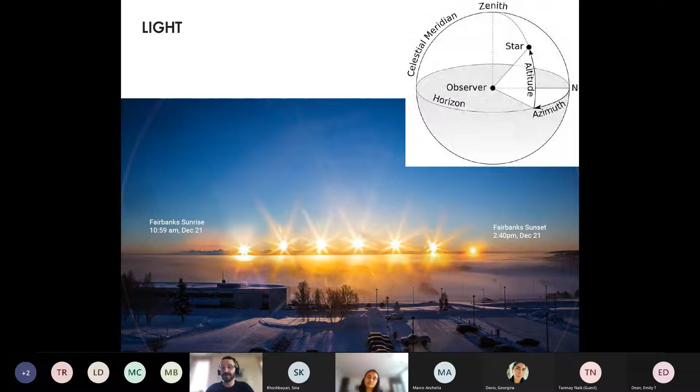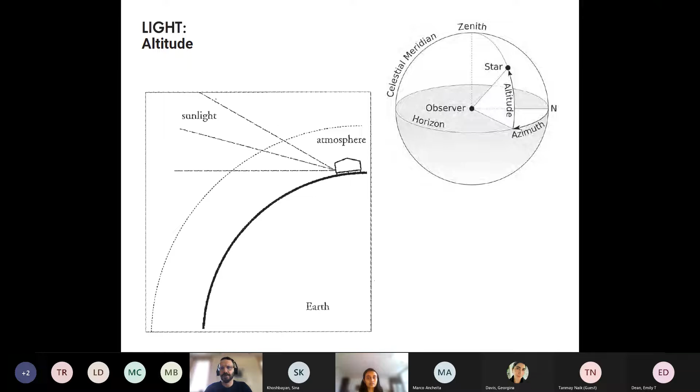However, it sets and rises in different places, and also because of our northern location, the sun never reaches the same altitude. If you're near the equator, then you know that at noon on June 21st, the sun is almost directly overhead. It's almost at a 90-degree angle in altitude. And in the north, it pretty much never gets that high. It is much lower in the sky, even on the longest day of the year.

Next slide, please. What does that mean? It means that our light is fundamentally more horizontal in nature than it is in most places in the world. The sun is not necessarily always overhead. It is out there somewhere in front of you in a horizontal relationship. Obviously, this is a small thing and it's a huge thing. It has an amazing effect on what we do with buildings.

If you live on the equator, then you block the sun because it's too hot, but you block it through your roof. If you're in the temperate regions, the mid-latitudes, then you filter the sun so that you get it when you need it in the winter, and you block it when you don't need it in the summer. But again, you're blocking it and filtering it through your roof, through a horizontal surface,

working against or with a vertical design input. In the north, we try and capture the light, but we do it through our walls. We don't do it through our roof. We do it through vertical pieces of architecture. And this has huge implications on very simple things about what a building should do, how it should behave, and what it should look like. Next slide, please.

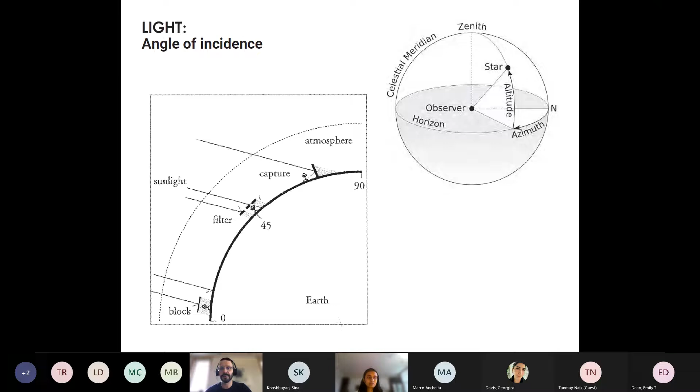It's a basic passive solar gain diagram. It's 101 level stuff for coursework in architecture and design. To calculate a proper overhang, you take the angle of the sun on the summer solstice, the one that you're trying to block. You take the angle of the sun at the winter solstice, the one that you're trying to capture and allow light to enter deeply into your room.

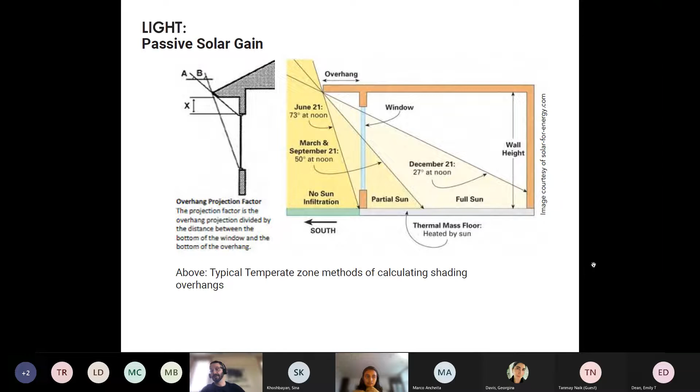And you calculate between those two an overhang in a horizontal dimension that'll allow you to capture the winter sunlight and block the overheating potential of summer sunlight. So this is something that we already all know how to do in architecture school. Let's bring that to a northern context with everything we've just learned about the quality of northern light. Next slide, please.

If we were to take the same process of creating an overhang based on blocking summer sun and allowing winter sun in, those overhangs would be incredibly unmanageable and structurally unbuildable. And that's even before we handle the snow load. So our best practices that we've already learned, they don't work in this new land. They don't work the farther north you go.

So we have to think differently about the way that our buildings are going to allow for daylighting and for blocking of sun. Because if in the winter the sun rises and sets in the south, then there is virtually no reason to have windows in the north side of your building. Northern light is much coveted in architectural circles, in warm places and in hot places. It's a nice base, cool light. It's always been the best light for artist studios, for architecture studios. You don't worry about overheating.

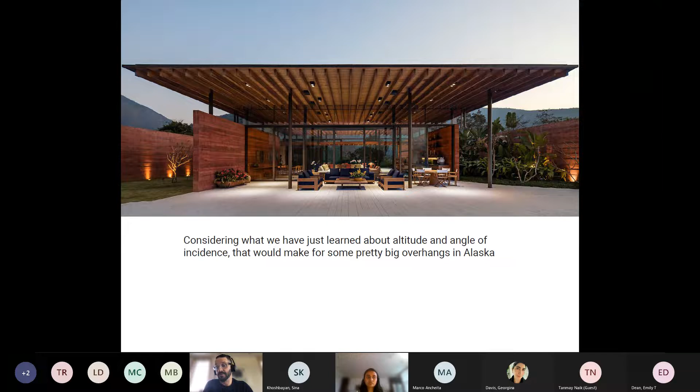In Alaska, in the winter, when you need the heating the most, you'll get no light from the north of any kind, unless it's refracted off the snow. Northern sides of buildings are just places where you leak heat. They're good places to put windowless areas, bathrooms, loading docks, server spaces. Next slide, please.

Additionally, if you're thinking about energy production, then we're thinking of new ways to treat this northern sunlight as well. If you want summer sun for solar PV, if the sun is hitting your wall more than your roof, then that's where your PV belongs. If your sun is never going to get to the angle that it does in the temperate region, then the more vertically angled your solar PV is, the better.

Additionally, if you're getting most of your light in the summertime, where we have a high azimuth for our light, then an eastern and western face of the building may be as worth the investment, not only the southern face of the building, because we're rising at 3 in the morning in the north by northeast, and we're setting at midnight in the north by northwest. That's plenty of time for the sun to hit the western and eastern faces of your building. There are other reasons that you see this. Next slide, please.

The conventional wisdom is that the best orientation for the most efficient solar production for electricity is the latitude plus a certain amount of degrees. But once you get above 60 degrees latitude, the difference in efficiency really is negated by simple things like snowfall. So here we have an arrangement of solar panels where 3 of the solar panels are put at what math would tell us is the optimal angle for getting the most electricity out of the sun.

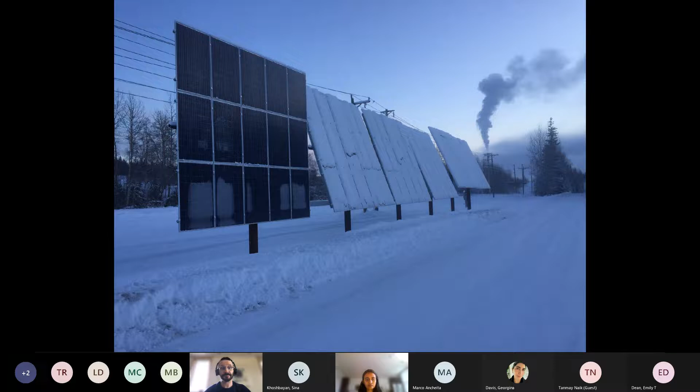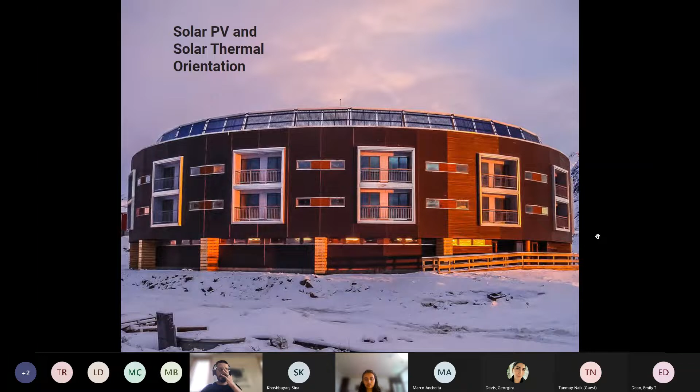Here's a building. It's a dormitory building. And when I look at a building like this, I think to myself, at least in terms of light, now we're thinking like northern people. This has solar thermal array on the building, but the solar thermal array tracks the natural azimuth of the sun in the summer. It goes all the way from the northeast to the northwest, so that it can be getting warmth and hot water for the full amount of the sun's horizontal traverse across the horizon. It is also on the roof, but it's in a near vertical position so that it's able to get that horizontality of light.

And the rest of the building looks warm. It looks fortressed against what is obviously a physically antagonistic environment. I think this looks like a building that belongs in the north. Next slide, please.

So now we just spent 5-7 minutes talking about how we have to relearn everything we thought we knew already about light. And we're going to have to go through this exercise in a primer lecture about northern design for land, for warmth, for any other of things that we already knew quite a bit about that we need to unlearn. So we're going to move on from light to land. We're going to talk about the way that the Arctic specifically has a relationship with land.

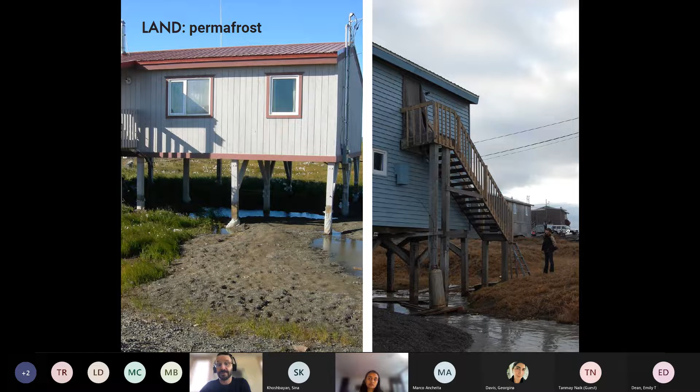But if your first question when you get a new commission is, is the ground frozen? Now you're thinking like a northern person. Now we're thinking like northern designers. It's an important part of how we approach a site. Next slide, please.

I'm going to show you a couple experimental foundations. These aren't things that I am going to present as best practice because I'm in research, and so we're supposed to be pushing new types of foundations. So the foundations I'm going to show you here are not necessarily typical, but they are things that we're working on to try and appeal to the level of change that we're undergoing right now.

This first foundation is in a village called Mertarvik, which is being moved. It's a village of 280 people that is being relocated as their village falls into the sea from coastal erosion based on climate changes. The problem with moving 280 people across a bay to a new location is that there's no time for platting and subdivision planning and surveying. And so the houses don't have a site. There's not enough time. So we had to create a foundation that was movable on skids.

We created a rigid foundation of a space frame that's on skids that could be built during the short summer seasons and not have to worry about being held back by administrative issues. Once the new town is platted, this house can be towed, or was towed, to its plot. You know, with as many difficult issues as we have with our physical environment, worrying over the permitting and legislative environment is not a luxury that we have. And so there's kind of an urgency to the way we design foundations. Next slide, please.

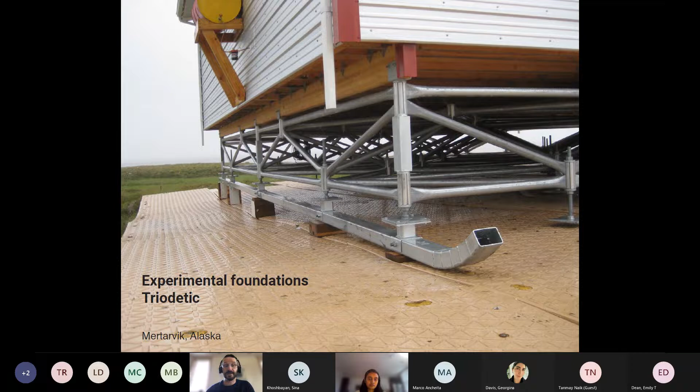And the people we like to test the more risky foundations on are ourselves. This is where I live. I live in a little group of 4 buildings called the Sustainable Village at the University of Alaska Fairbanks. We designed them specifically because the land is 31.5 degrees and ready to thaw. When that happens, no insurer, no bank, no developer is going to touch this land, and it's in the middle of town. And so how do we deal with the changes that we're seeing in our landscape?

So what we did was we built these 4 houses. I live in the one in the top left, the yellow one. You can see University of Alaska in the background. We tested these houses with various different foundations, some of them more conventional, some of them a little braver, to try and see what will happen when that land inevitably thaws. And then we put thermistors down in the land 30 feet so that we're ready when that happens. Next slide, please.

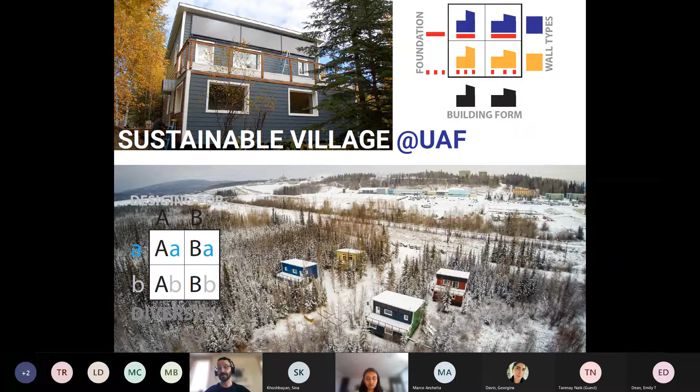So in the house I live in, we basically built a foam raft foundation that we're hoping can span the land when it finally melts, while simultaneously buying us some time to keep the melt from happening. So we've got over a foot of foam insulation married into the network of lattices. You can see that that's steel framework. Now, if you've taken your thermodynamics course, you're thinking, why the hell are they using steel? That's a great conductor of heat. And we're going to talk about that a little bit later. Next slide, please.

This is the research center itself. It's the northernmost campus of the National Renewable Energy Lab. They have a couple campuses in Colorado, one in DC, one in California, but this is the Arctic one. It's on terrible land. It's on land that is fractured schist and more silt than anything else. And it was cleared at one point, and then began to thaw. When land thaws, it does unpredictable things, we have found.

What we did was, because it's a large building, it's 20,000 square foot, you can see in the bottom portion, we excavated what looks like a pond, but really we excavated the mass of the building and we put it on the site for 2 years to overwinter to see how the land, as it changed its thermal regime, would handle the load of the building. We were able to make some assumptions based on that data. Next slide, please.

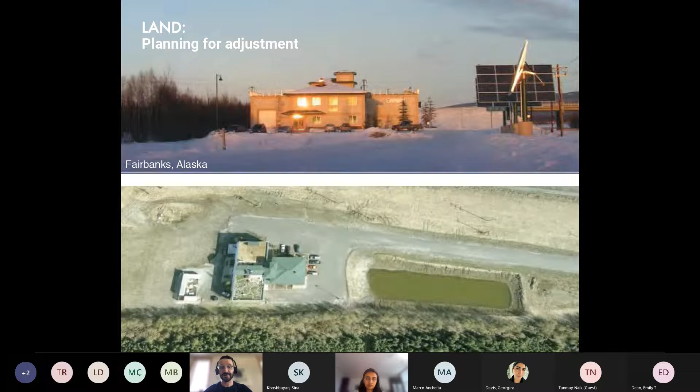That's not really enough, because a couple tons of dirt on your site before you build the building isn't really going to tell you exactly what the building is going to do. And so after that, we super insulated the foundation, but we also mechanically separated the spread footing from the grade beam of the foundation. And what does that look like? Next slide, please.

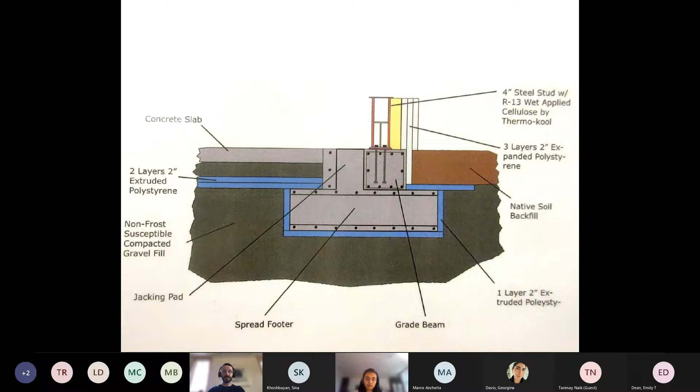It means that in each pilaster, we have a plenum where, if need be, and the ground starts to really change and melt, we're able to jack the foundation and move the building. At 20,000 square foot, I believe this is the largest adjustable foundation in the Arctic, in the north. And for better or worse, we haven't gotten to test it yet.

You know, half the crew here is pretty proud that we insulated it enough that we're still on stable soil, and the other half is getting pretty impatient that we haven't had a chance to test this new toy and see if we can adjust a building this size. And that's what research looks like, waiting for disaster and then getting impatient if it hasn't come yet. Next slide, please.

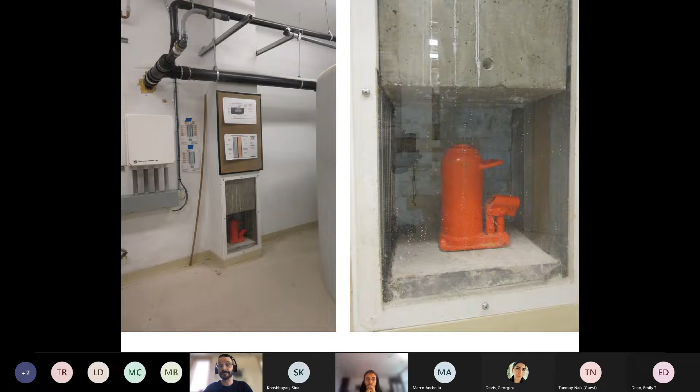So we've talked about light, we've talked about land. This is probably the least surprising one. In the north, we always talk about heat. Heat is king. 80% of our energy load is heat instead of electricity. When you live in a place that is cold enough to kill you, you care about your heat more than you care about your light from an electricity and power standpoint.

The interesting thing is, all the animals that thrive in the north, they don't eat more food in the winter in order to stay warm. Northern animals grow thicker skin. They grow blubber, they grow fat reserves, they have thick coats. They don't just eat more. And yet, for most of my lifetime, the way that the design industry has treated northern buildings is to have thin walls and just feed them more fuel. It took an embarrassingly long time to rethink that. And it is being rethought now, but it's late to the game.

Generally, a northern wall or a northern approach to heat, a northern building should have thicker skin, unless you're using something like vacuum insulated panels or aerogel or some of these magic materials that we rely on or hope will come into the industry for us. Until those times, a northern wall is a thicker wall, and it's a wall with a thermal break. It's a wall where nothing that's touching the inside of the building is also touching the outside of the building and forming a bridge between the cold of the outside and the warm of the inside.

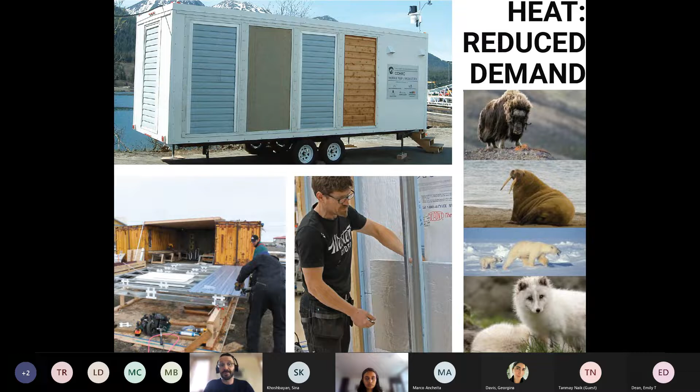And this is what that looks like on a construction site. We're looking at a lot of petroleum-based polyurethane, bad for the environment materials that we're used to using to get our thick coat on our walls. And that's really where the next jump needs to be made: if we need a thick wall, what are we going to make it out of that has some presence in the circular economy, has some ability to go back to the earth? Because right now, out of desperation, we use a lot of pretty bad stuff to keep ourselves warm. And I think that's where we need to go next.

If half the R&D went into the demand side that it does on the supply side, we'd be doing all right. And as young designers, as people getting ready to start your careers, if you're interested in being someplace exciting, then the demand side of envelope and the way we do envelopes in buildings, that's an exciting place to be positioned.

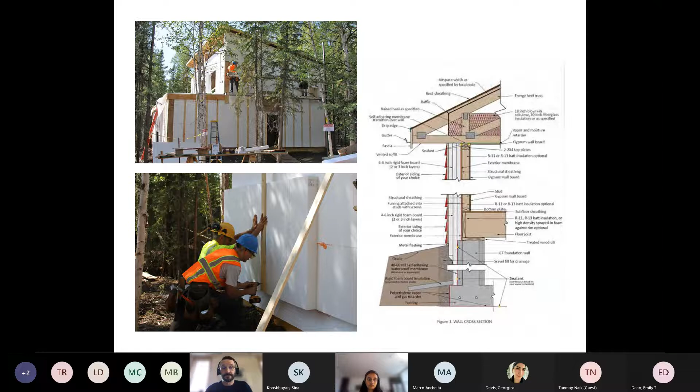And it's not all chemistry and rocket science. Some of it is really simple stuff. A northern building will leak less heat if it has more volume as a relationship to its surface area. This is simple geometry. It's something that we need to think about as the first principle. If we're a northern designer, or even if we're a southern designer designing a building for a cold climate, half our job could be done with geometry, thinking about what is the surface area to volume ratio of our building.

That is the easiest. We don't say low-hanging fruit in Alaska because it's too cold to grow fruit here, but that's the easiest, simplest thing to get at first: what is the shape of my building?

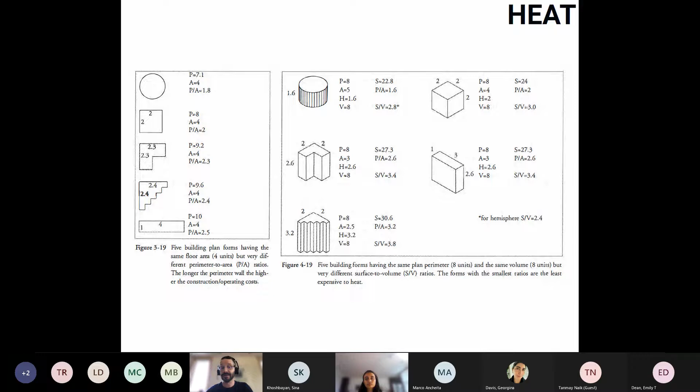These types of things do not take fancy wall sections. These are simple ways of looking at space, looking at warmth, and looking at a building not just as a place that you occupy, but the thing that keeps you warm and keeps the outside out and the inside in.

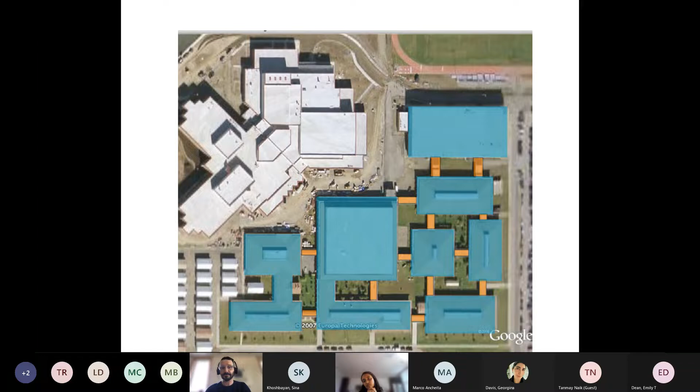So thermal bridging and detailing is something that comes into play here because not only do we want to limit our surface area to volume ratio, we want to make sure that in key places like inside corners, in our stair platforms, in our building plates, our floor plates, how are we going to insulate those? How do we wrap a coat around the parts of the building that are supposed to tie our structure together?

It creates a new way of thinking about structure. A northern way of thinking about structure is that all of it happens inside the coat. If you've ever designed a curtain wall, that is the opposite of the way that you're used to thinking about buildings. Generally, the structure happens on the outside of the thermal layer.

So again, and if you're sensing a theme here, I think it's something that is meant to be obvious. Fundamental things that we know to be true are opposite when we get to a place that gets to 60 degrees below zero in the wintertime. And those fundamental things that we think we know are probably the most dangerous things as we move and practice in a new place.

If I were practicing in the desert, I've never spent much time in the desert. Chances are I'd make some pretty elementary mistakes from the point of view of a desert person, because all of my thoughts of what a building's supposed to do are based in someplace far, far away.

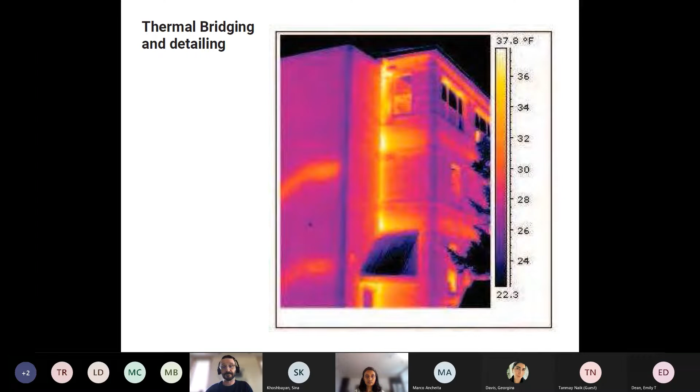So we can do more intelligent supply. I know that some of the people on this primer lecture are hoping to design a building in Cook Inlet in Alaska. Cook Inlet is a great place for all types of supply. It's probably one of the most energy-rich basins in the world. It's got some of the biggest tides in the world. It's got big winds. It's got interesting solar. It's got geothermal volcanoes. It's even got oil platforms. If you can run a motor off it, it exists in Cook Inlet.

If you live in Arizona and it gets very hot during the day and very cold at night, it's pretty easy to use the heat of noon at midnight. You just need to somehow store it for 12 hours. It's a lot easier to use the heat of noon at midnight than it is to use the heat of June in January. And that's really the problem that we have in the north, is how do we store heat from the summer when we don't have much need for it, but where the sun is up all the time? And how can we store it for 4, 5, 6 months? This is an interesting thing to work on from a thermal battery standpoint.

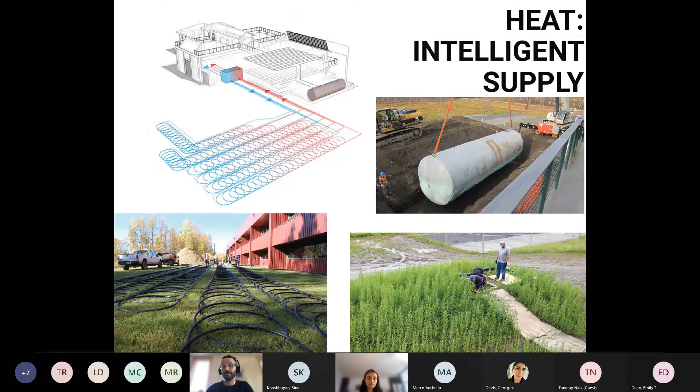So going through this pattern, we've been talking about light, we've been talking about the land, we can talk about air. Arctic peoples have the highest rate of respiratory infection in children and elders in the world. And it's not because this is a traditionally humid place. It's because we spend quite a bit of time indoors, and because the building physics of moving air and moving fresh air in a cold place are extremely complicated. And if not complicated, at least daunting.

We have a pretty terrible amount of mold in our buildings in the Arctic, and that's not just Alaska, that's everywhere in the Arctic. And there's a specific set of reasons why that happens.

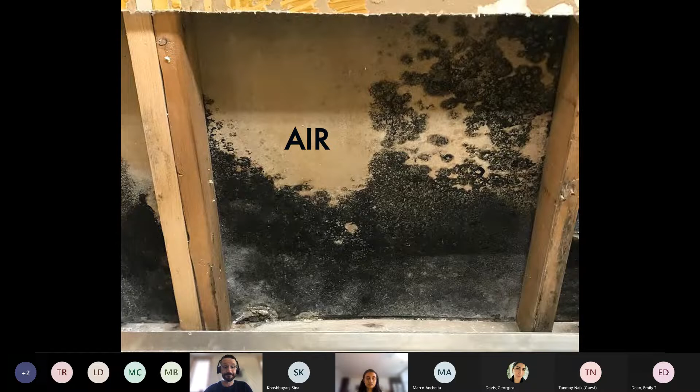One of the reasons is that if you're in an economically depressed community, you're more willing to pay for heat than you are for fresh air. If you don't have good heat, you can feel it. If you don't have fresh air, maybe you can smell it, but you can't see the things off-gassing from your furniture. You can't automatically feel the problems with health that come from breathing bad air.

So in economically depressed communities, it's very common for people to sabotage their own indoor air quality to save on their heating bill. And getting around that can be very difficult. It leads to mold, it leads to a lot of pretty terrible things.

So we're always trying to recover heat through our mechanical systems, heat recovery ventilators and energy recovery ventilators, things that allow the outgoing, all that wonderfully warm, terribly dirty outgoing air. We want to steal that energy and give it to our wonderfully clean and terribly cold incoming air. And from an engineering standpoint, that's no small trick. That takes some doing. Next slide, please.

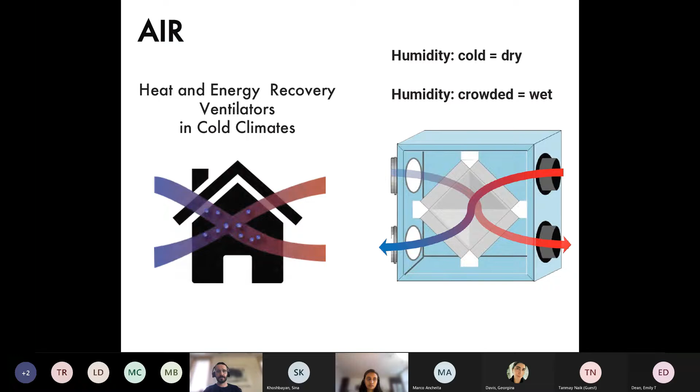So if you see things like mold in a northern house, if you see things like weeping windows, it's generally not a problem with the wall or the window. It's more often that we're underventilating, and underventilating is something that's very common here. Next slide.

The key then is to marry our fresh air to our warm air. If the air that you need that's warm is also the air that you need that's clean, then you're never going to turn it off. And so we spend a lot of time thinking about how to marry fresh air and warm air with our mechanical systems. And if you're an engineer, if you're an architect, this is an interesting idea. If you're an engineer, this is an exciting problem to work on.

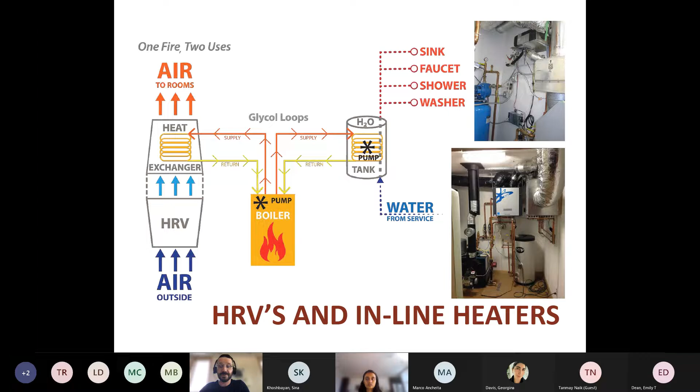Because we don't want the problems someone's already solved. What fun are those? We want new problems to solve, and here's one. If you can figure out how to make your warm air your clean air in a very cold place, then you're going to be doing important work. You're probably going to make a fair bit of money. It's a field that is still in its infancy, and I think it's something that's worthy of inquiry. Next slide, please.

The fundamental thing that I think causes the most mold in northern structures is a misunderstanding of dew point. Dew point occurs everywhere in the world. It's that temperature at a certain humidity when the gaseous moisture in the air turns to liquid.

If you're in Georgia or Indiana on a hot day in the summer and you have a cold beer or a cold can of Coke on your table, it immediately starts to gather water because it's cold enough that all the moisture in the air, the humidity in the air, condenses on the surface of the can and makes it wet. Wonderfully refreshing if it's a beer, terrible and catastrophic if it's a wall. If we don't understand how dew point works in northern context, we run a risk of rotting out our walls.

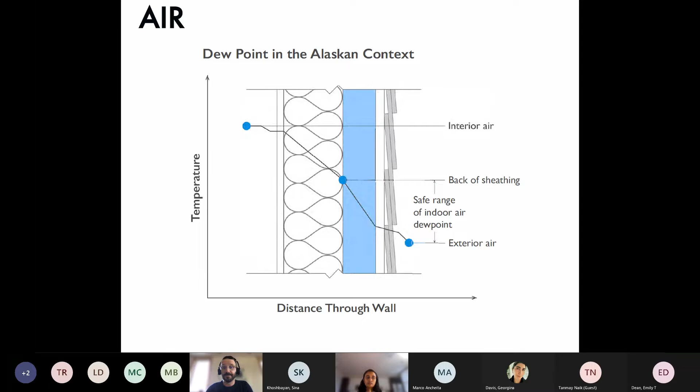And that's easier said than done. And Alaska is a big state. The Arctic is a large region. So dew point calculations are down to the city. They're down to the latitude. They're down to coastal versus interior.

If you're designing a building in Alaska, there are a series of dew point calculators that are down to the town, where you can decide how much impermeable insulation needs to be on the outside of the wall versus how much on the inside. And I'd encourage you, if you're actively involved in the design of a building, to get to know these dew point calculators and use them as much as you would any other tool in your software. Next slide, please.

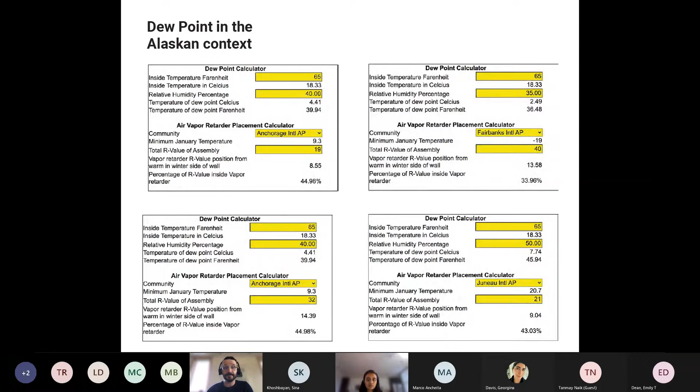One of the things that dew point is also important is because we have significant amounts of air leakage in cold climates. Stack effect is the idea that cold air will sink and warm air will be more buoyant and rise in any building. This isn't unique to the north, but the bigger the difference between your exterior temperature and your interior temperature, the more forceful stack effect is.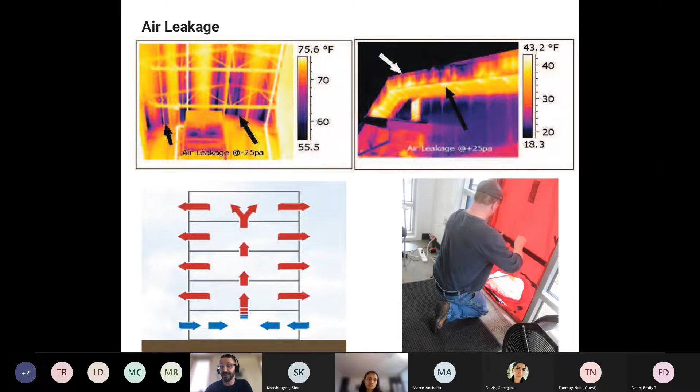So a 4-story building in a place like Washington, D.C., and a 4-story building in a place like Fairbanks on a day when it's 40 below is vastly different. So you have incredible pressures, positive pressures on the inside of our ceilings, and you have incredible negative pressures at the base of our buildings. Next slide, please. How do we handle this?

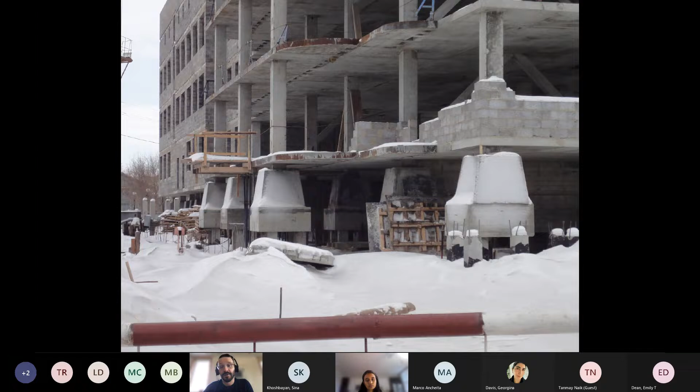This is the Russian approach. This is a building in Arctic Russia. You can see that it looks like it's built on the ground and that it's not particularly worried about stack effect. But if we tear the skin off, next slide, please, we can see that the entire base of this building is false, that it's not actually the base of the building. These giant, very expensive concrete members are lifting the building up above the permafrost so that the finished floor is over 2 meters off the ground.

And it's doing that for two reasons. It's understanding that stack effect is going to be intense in this incredibly cold environment. It's allowing that negative pressure to come into the building, all that cold air, and then putting your insulation above it so that the stack effect is not as damaging from a standpoint of heating. It also has an added benefit of keeping the ground frozen, because as we remember, the default status of the Earth is supposed to be frozen in this community. And so they're trying very hard to keep it that way. Next slide, please.

When we fail, you can see it. If you design a building that hasn't taken stack effect or pressurization or dew point into effect, you can see it in the roof, you can see it in your structural members, you can see it in your walls. It rots quickly. It is very unforgiving. Nothing fails small in the Arctic. Things only fail big. And so when you have an oversight for a detailing, it's not going to be a small problem of detailing. It's likely going to be a fairly significant one that you'll be able to visually see rather quickly. This is good from a repairs and modification standpoint. It's bad from a cost and liability standpoint. Next slide, please.

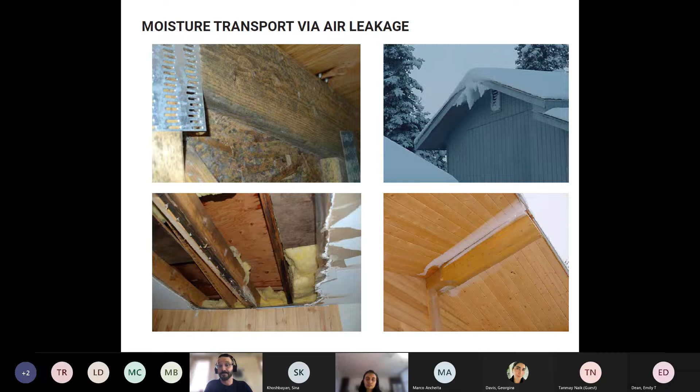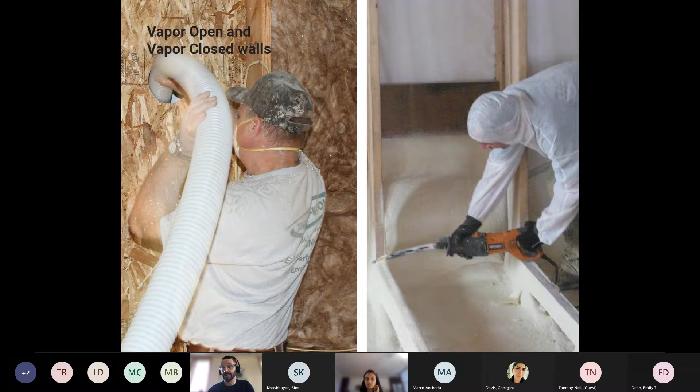So we anguish over vapor open and vapor closed walls. We anguish over whether or not we should be allowing diffusion through our walls. It's not really correct to say a house breathes, but, for lack of a better word, is the house supposed to breathe? Is it not supposed to breathe? That's not an easy answer in a cold climate. Depends a lot on humidity. It's a level of expertise that takes a long time to ascertain. If you're designing buildings for a cold climate, it's a good idea to have a consultant that this is all they do. This is all they think about, diffusion and air leakage in cold climates. Next slide, please.

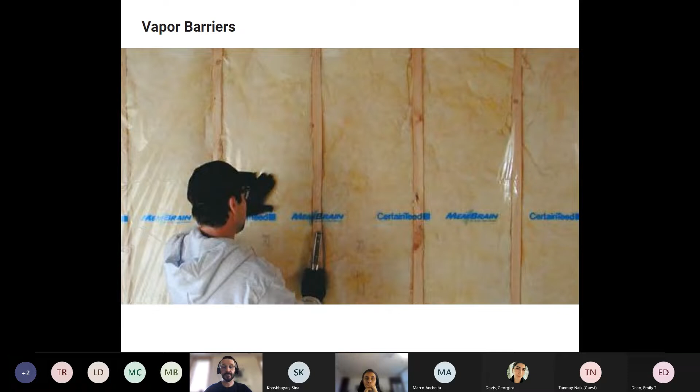And our vapor barriers have been our traditional way of handling that. Wrapping the entire inside of the building in plastic on the warm side of the wall. That's been the best practice for most of my lifetime. There are probably better ways to skin that cat, but so far that's still what is most common. It's skilled labor. It's not something that can be done by just anybody. It's something that you should definitely schedule into your inspection regimen. A contractor should always know that you want to inspect the vapor barrier once it's finished and installed, but before the interior sheathing goes on, and then the proper attention goes into it. Next slide.

If you're in a village with permafrost and no water and sewer, then someone in the family's job is to take a bucket full of your human waste and walk with that bucket in hand to this receptacle, and pour it in by hand. Usually it's a kid, and then someone comes and picks it up and brings it to a lagoon. And that is another pretty big problem in Arctic regions.

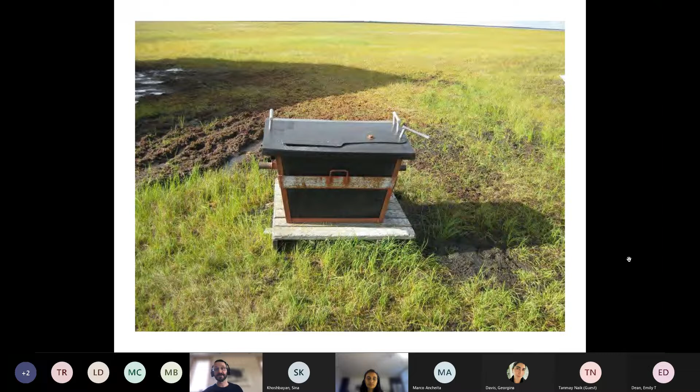The alternative for most of my lifetime to that bucket, we call it the honey bucket, is this: a water system, a sewer system that is above grade, because remember, the ground's frozen. We can't put it below grade. It's above grade. You've got to drive over it. You've got to put bridges over it. It's a line that everyone can see. It's a line that's out in the elements and has to be mechanically heated so that it doesn't freeze, and it goes to the treatment plant at the edge of town on top of the tundra.

The idea, well, there are many places in the Arctic that still don't have running water and sewer. We're still using buckets and we're still hauling water from the river, which is crazy because the Romans and the Chinese had running water thousands of years ago. But those are southern aqueducts.

I think it's no mistake that the idea that you should defecate in the same place that you sleep was invented in the South, because no northern person would have ever invented that. I think that it's an assumption that we make about the way that houses work and the way buildings operate. If our primary concern was keeping that thawed enough to get it someplace safe, then we wouldn't set up our infrastructure in a linear fashion. We'd be doing something different.

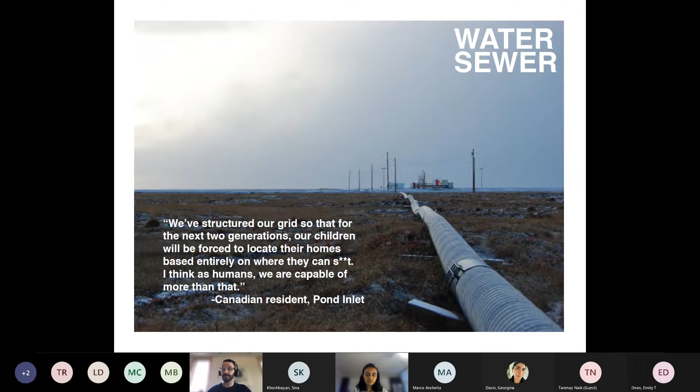Next slide, please. So these are systems that think more like the northern context. We have site-based single-family sewage treatment plants, as opposed to trying to run pipes all over the tundra in the cold to get to a centralized sewage treatment plant. Now, if we come from an urban area or a southern latitude, we've been taught that centralization increases efficiency, but only above zero. Centralization does not increase efficiency below zero, or not necessarily anyway.

And so many of our approaches to infrastructure need to be point source if we're able to build buildings that will work in our physical environment. So this is a house-based sewage treatment plant. Next slide, please.

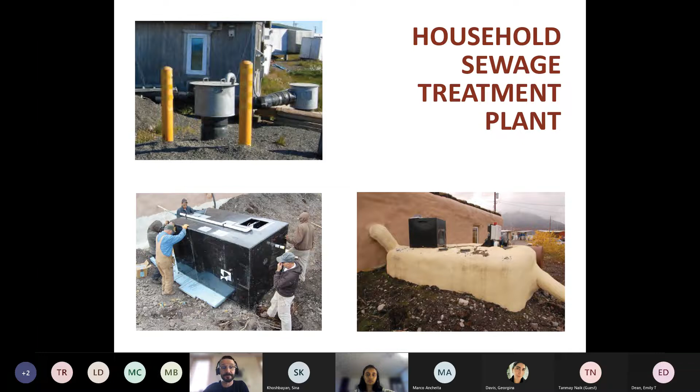And this is a water purification plant tied into a sewage treatment system for a northern context. And basically what we're doing is we're imagining delivered water, and we're imagining treatment of wastes on site in a way that it can be at the scale of the home, the scale of the building, instead of the scale of the village or the community. And this is a very different way of looking at infrastructure. Next slide.

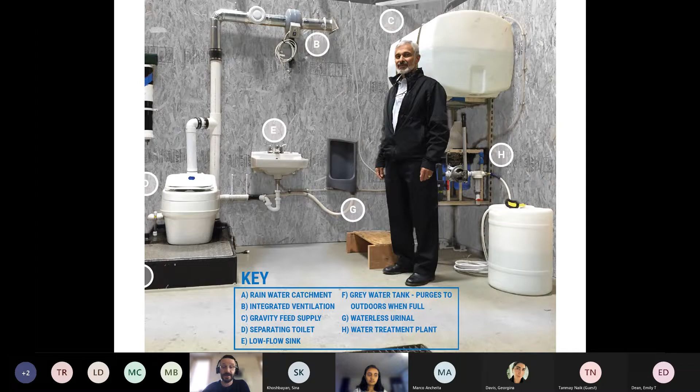Snow is vector transport of particles. So when you think of snowdrift, think of it like sand dunes. It doesn't matter how much sand there is. It matters what the wind does with it. So when we think of snowdrift, we don't think, oh, it snows a lot in this area, I bet there's worse drifts. What we should be thinking is, this is a windy area. The amount of snow from a calculation standpoint is considered to be infinite. So the wind is really what we want to track: how much snow is moved around.

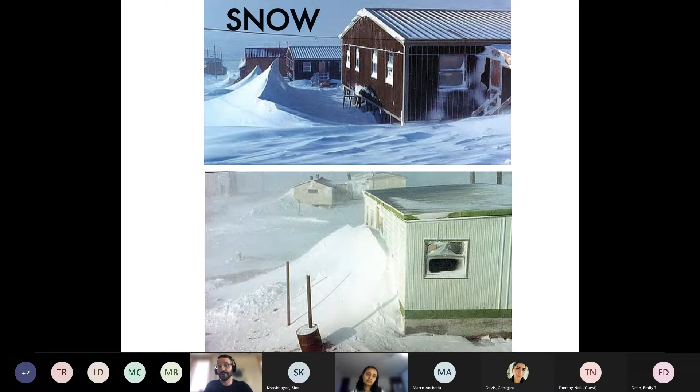Next slide, please. And that is more or less predictable. In an area prone to snowdrift, there will be a scour zone roughly equal to the height of the building in front of the building on the windward side. On the leeward side, the far side of the building, the part sheltered from the wind, the snowdrift can creep to 10 times the height of the building, and it can bury the entire building on the leeward side.

If there's any rafters or river hounds here, it's a lot like eddies in a river. When you're in the fastest channel, it's clear because there's not as much in suspension. It's moving fast. When you go out to an eddy, that's when the sand and the silt and everything gets deposited. Snow is no different. As soon as we find shelter from the wind, the snow finds a shelter as well.

And so an incredible amount of unnecessary diesel fuel is used to dig buildings out. It's a place where we could do better as designers. Next slide.

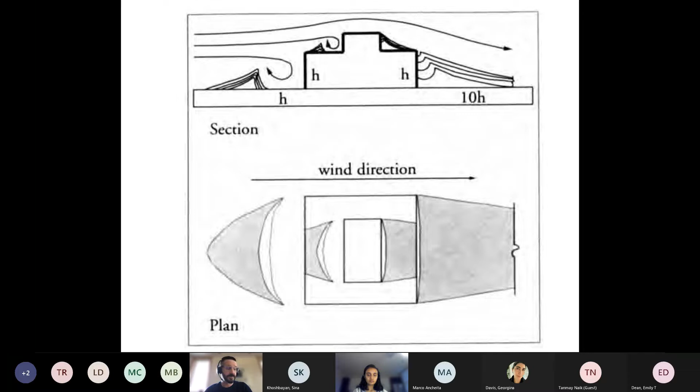So this is not an asterisk, this is a prime determinant in many regions of the state. Not every region, so just like when we talk about permanently frozen soils, one of the first things we should ask is: is snowdrift a design input for this region? Next slide, please.

So thinking about accessibility, thinking about universal access to our buildings is different in a cold climate. Our buildings are up off the ground. We're dealing with snowdrift. We're dealing with different things. And so it's something that we need to consider in our design. Next slide, please.

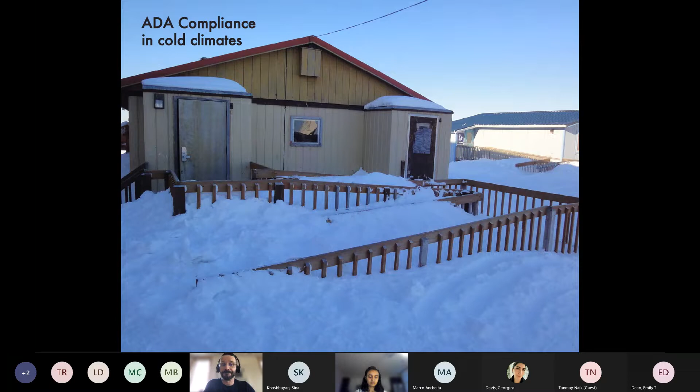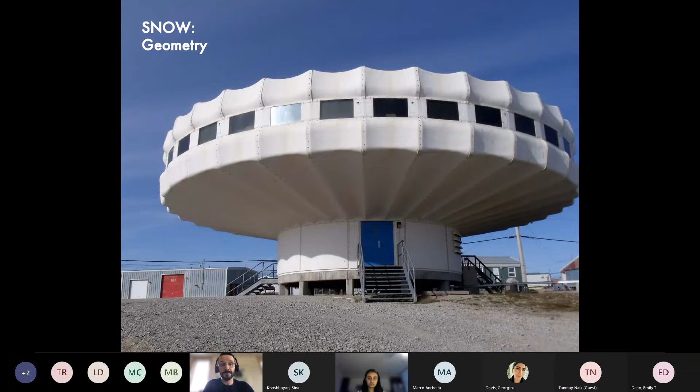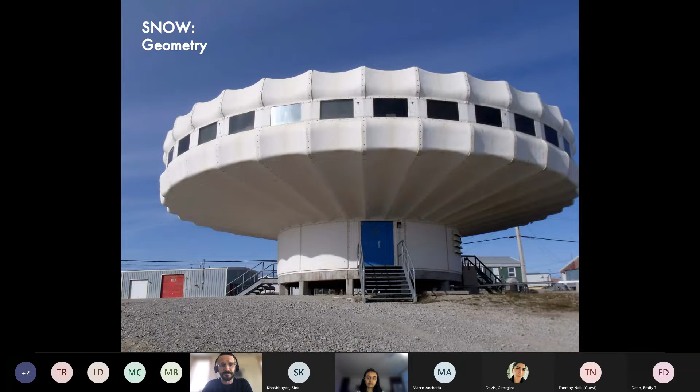Now you could handle snowdrift completely just through geometry. This is a research station in Cambridge Bay, I believe, that basically is optimized for snowdrift. Go ahead and next slide, please. So it was created specifically because it was going to be deployed in a place where buildings were routinely buried by snow. Not that there was that much snowfall, just that it was a very windy place.

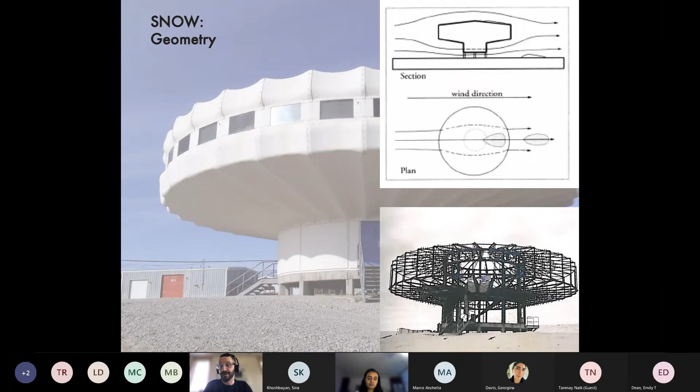It's one thing to handle the physical environment, but there's also the cultural and the way that we use space. Sometimes those don't line up nicely. And so it's important to think not only in terms of the physical parameters that we're trying to design for, but ultimately buildings are for people. At the end, you want a building that people are going to want to occupy. It's not merely enough to be able to respond to the physical parameters of the environment. Next slide.

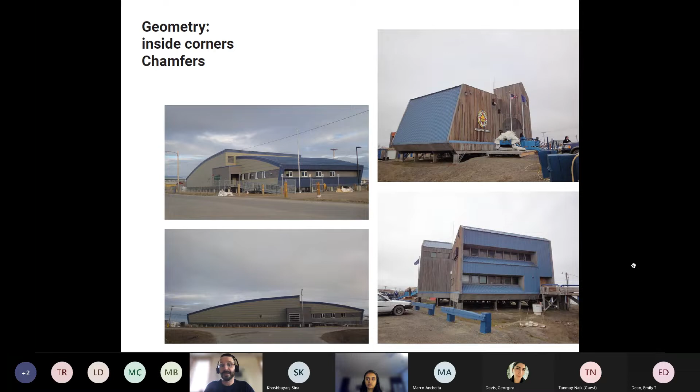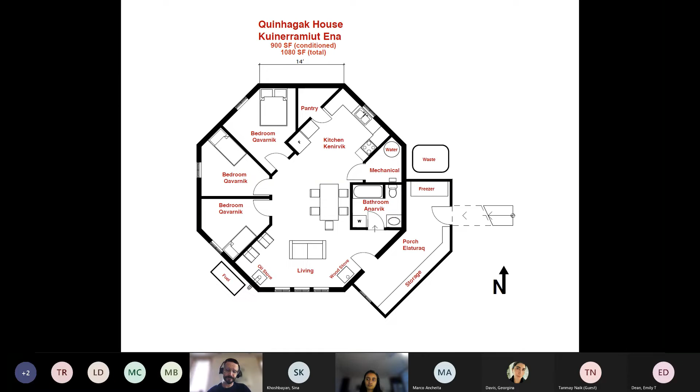And what we did was we did an analysis of creating what an octagonal structure might look like. We put the entryway on the southeast portion of the building because that's where the prime wind was coming from, so that it could lean into the wind like a bison or a moose. And basically every time you started to turn a corner on one of these 45 degree angles where the snow would start to deposit, you would turn the corner, it would speed up, and you'd be able to self-scour the building. Go ahead and go to the next slide.

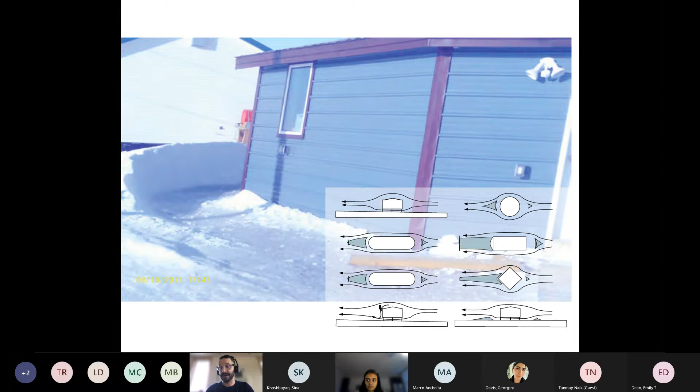We had an unintended consequence in that we had some frost heaving at the foundation. It was an unacceptable level of frost heaving, so I came back the next summer and we layered earth up against the building to try and buy us some time from an insulation standpoint. Next slide, please.

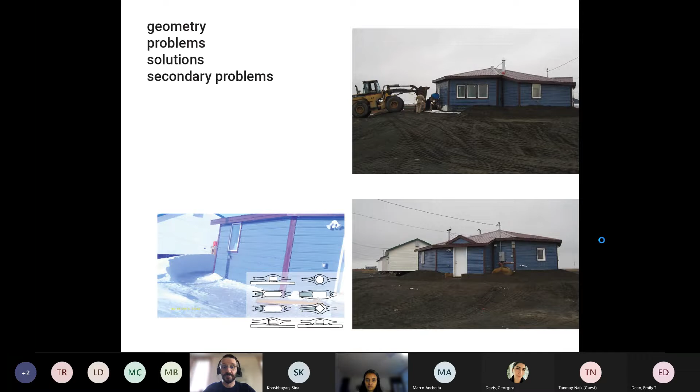And I'm glad I'm in research because this was very exciting. This is a wonderful failure. We were very excited about it. We said, man, isn't this so interesting that you change the thermal regime of the floor plate, and suddenly, even though you're not melting, you're burying the building, and the resident is like, yeah, that's wonderful. Could you put my building back to the way it was before? It makes research an exciting place to be, but buildings are still for people. So we have to figure out how to deal with this.

I remember I was pretty young in my career at this time, and I remember talking at a community meeting saying, this is a great shape, and we've done some vector analysis, and we think if we have this octagon-shaped building, that it'd be way better from a snowdrift perspective. And an elder person in the community stood up and said, yeah, that's why we used to design our buildings that shape. The local people already knew this. We have many generations of knowledge from a building physics standpoint. We don't need to reinvent things if we can remember them.

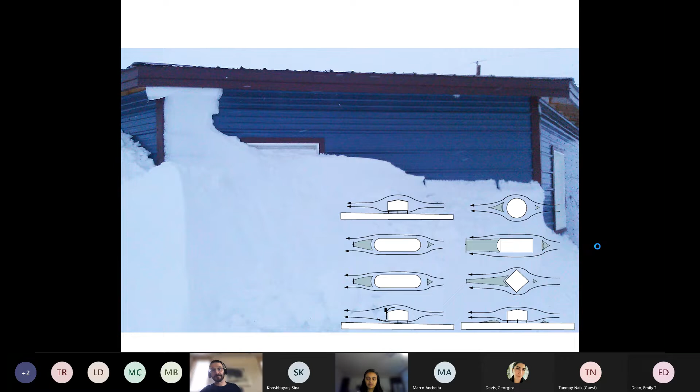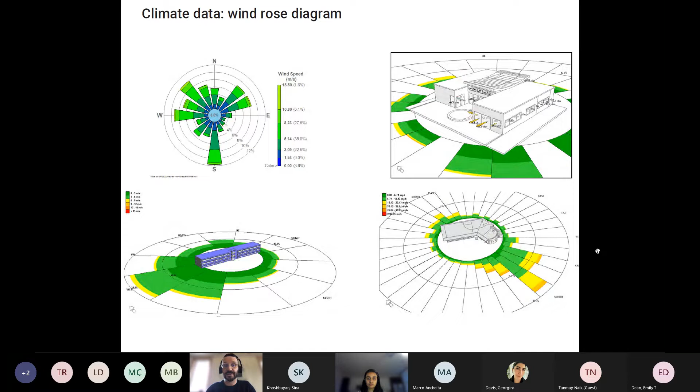So you can do this. You can get your anemometer. You can put your building on the site. You can use your software. You can get a wind rose diagram. You can figure out what the vector analysis of snow is, and you can set it up. Next slide, please. Or you can do this.

You can talk to elders. You can talk to people that live in the community. Everywhere in the world, old people sit around and talk about the weather. There's no place in the world where that isn't true, and Alaska is no different. So if you want to learn more about the weather patterns that are going to influence your building, community meetings and local, especially in either hunter cultures or farming cultures, people talk about the weather even more. We don't have much of a farming tradition in coastal Alaska, but we've got hunting cultures that are ancient.

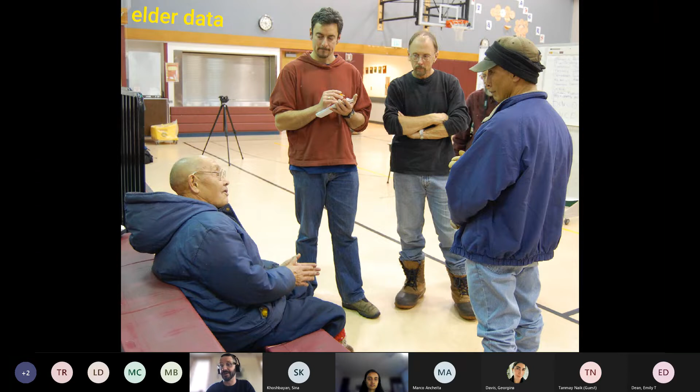And so that discussion of site microspecificity is uniquely available to you as a designer. So if you go to a community to work, the best thing you can do is stay as long as you're budgeted and a little longer to talk to real people that live there, and your building is going to behave better. Next slide.

And if we fail, it won't fail small. And so I think that's one of the problems: if you grow up in the north, you grow up surrounded by building failures, partially because of our physical environment, partially because of the nature of colonialism and its history, partially because of the nature of what cultures look like when they crash together. We have a lot of failed buildings in the north, and so it can be a daunting and intimidating place to practice architecture. Next slide, please.

The best thing we can do is listen. Stacey's going to talk with you tomorrow. She's an anthropologist. She's a good listener. I am not an anthropologist. I'm an architect. Learning to listen took some doing. You are not rewarded in architecture school for sitting and listening.

So the way that our profession, our education encourages us to create our vision and build it takes some re-education when we do community work, when we work with real people. If we work with people that aren't like us, that don't live in the same physical environment or cultural environment as us, it's a re-education that doesn't happen until you graduate. Next slide, please.

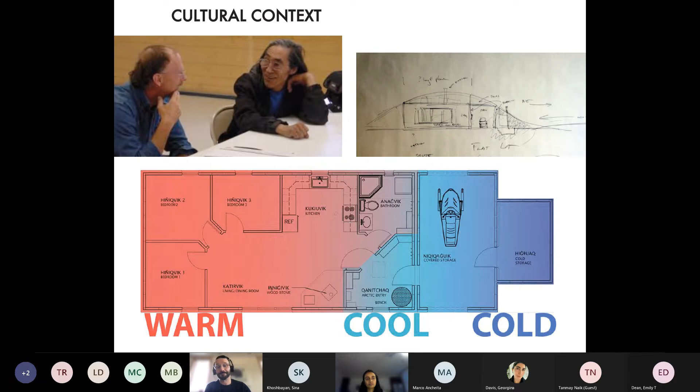And those lessons that used to be there. This is a traditional dwelling on the top where they would have an elongated entryway, sometimes even with a natural cold trap into the building in a very cold place. No one wants to live like this anymore. It's not like we want to live in sod igloos, but the idea of what an entrance should look like in a northern place: it should be long. There should be a grade change.

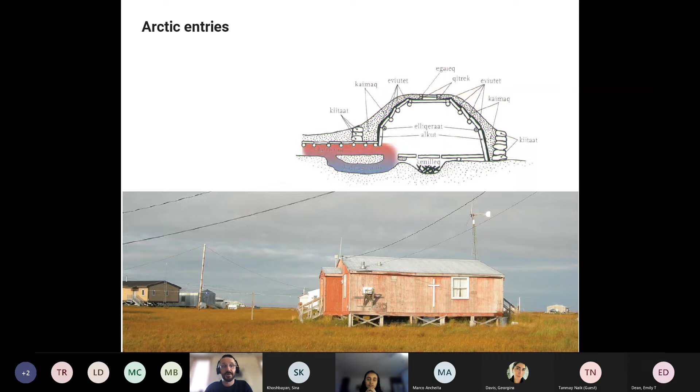And if we forget them, we live like square pegs in a round hole. You know, the idea that it's inevitable that the world is urbanizing has some truth to it, but it's not inevitable that the Arctic is better off from urbanizing if Arctic cultures are not necessarily prone to urban living, with some pretty ample literature to back up that it sometimes doesn't work out for the best.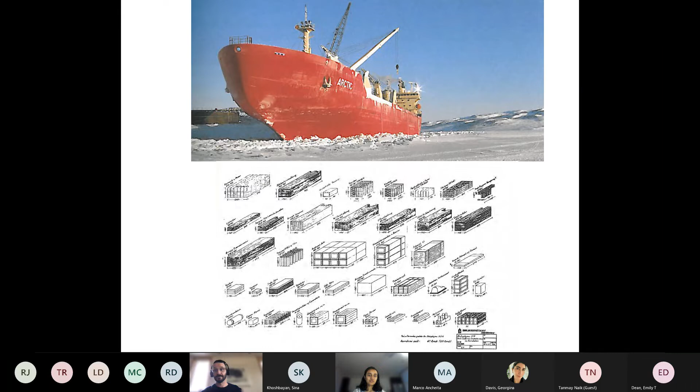Well, thank you so much, Aaron. This was the most immensely interesting lecture I have attended in a long time. And it was full of surprises. I mean, I was not aware of these things at all, but this was like knowing how building science principles are completely different in the northern region. And thank you for all the insights.

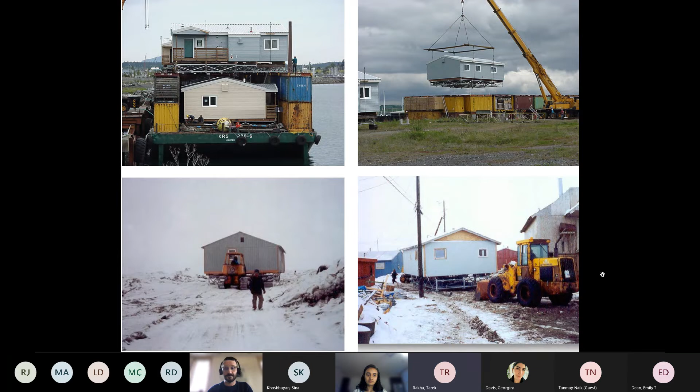The main one that I would like to ask you about, your personal experience, is you said that if we, in one way, learn from our past or ask the right questions of elders or those who have the memory, like learn from our heritage, we would not be doing any reinvention or any invention because we've already figured it out. Can you please share with us not just the moment where you've learned this lesson, which seems to have a relationship with that town hall experience, but actually the people that you seek out to ask these questions, and what kind of questions do you typically ask?

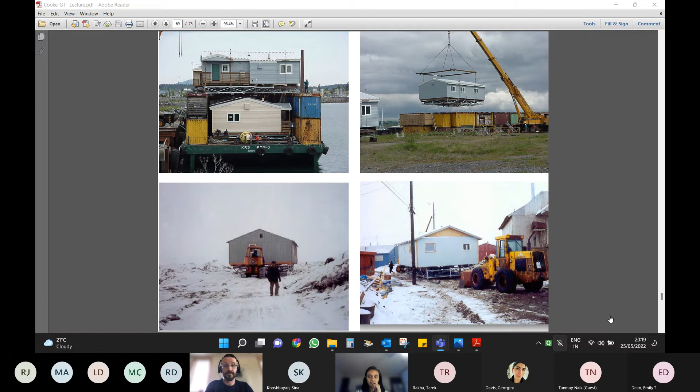Sure. Well, the truth is we need both, right, Tarek? We need memory, and we still need invention, because first of all, we don't necessarily want to live the same exact way as we did 1,000 years ago. We want improvements and we want invention. And also our world is changing so rapidly. There's no part of the world that is changing more rapidly than the Arctic when it comes to climate. We're warming faster. We started sooner. The problem is greater right now.

So we need both. We need invention, and we need our elders and people that understand how we lived before. And I say we as Northerners. I'm not an indigenous person. I was born in Alaska, but my roots are on the Eastern Hemisphere. So I think when we talk to people, let's say, for instance, I know there's a project in Tyonek coming up, right? How do we engage people? First thing you do is learn about the land,

but not necessarily just from NOAA, from the weather files, from your daylight files in your SketchUp plugins, but from standing there and listening to people talk about the way they view the land, because anyone that is in a long-standing community can tell me a lot about the land, but they can also tell me about their place in it, which is just as important when dealing with older cultures, with indigenous peoples.

In Alaska, and this is not just true in Alaska, this is true most places in the Arctic. If a town is 100 years old, it was probably a good place to build a port. It was probably a good place to build a mine. It was probably a good place to connect a railroad. If a town is 1,000 years old, it was a good place to eat. That's how settlement occurred in older times. So listening to people talk about food security, about the way weather interacts with traditional life paths associated with that, why people live in a place, what brought them there.